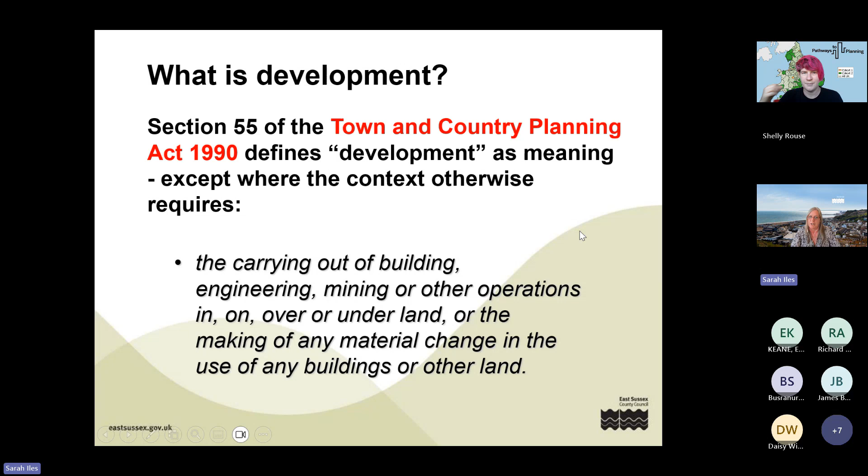So just very briefly, because it's not the focus of this session, for county council development, I thought I'd give an indication as to what sort of things we do. It can be challenging because when we're determining a county council application, we're the applicant and the decision maker, and that can be really, really challenging sometimes, particularly in the perception of the public. It can be, well, you're judge, jury and executioner - how can you possibly make a rational decision? So things can be challenging, but this is why we have transparency.

We make sure that everything is - if, say for example, we had an application for a household waste site, which our department deals with, it wouldn't be a report or a decision by the director. It would come down to head of service level or myself. So it's keeping those transparencies.

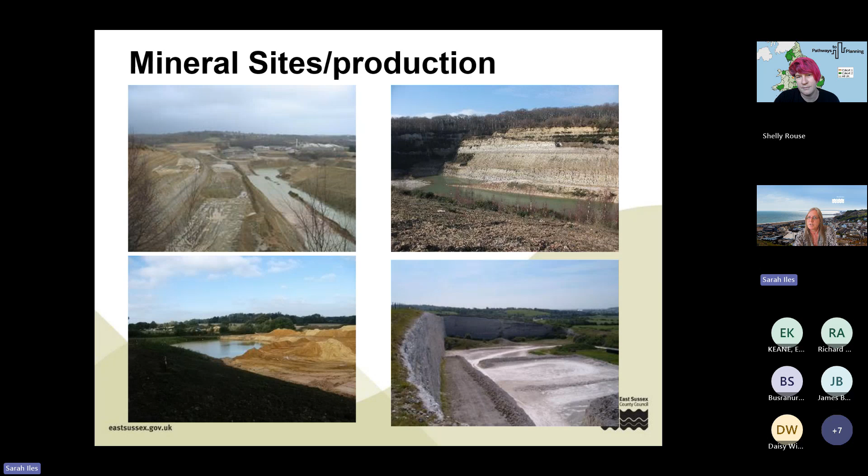So all of the working ones we have have now been restored, so we don't have any active ones, but there's nothing to say that if the need arose they couldn't be brought back, because the one here in particular, Tarring Neville, just outside Newhaven, used to be extracted solely for use in the Artex factory in Newhaven. If they resumed production, there's probably about 40 years of reserves there, so there's a lot of chalk.

Okay, so this is Land won, sharp sand and gravel.

So it's very different to the building sand, the soft sand. This is the only active quarry we have, and it's going to be running out. They have to cease extraction in January 2027 and restore the site by January 2028. So what that means is when the NPPF says we should have a land bank of 7 years supply for land won aggregates, we don't have that. So we are going to be reliant solely on imported sand and gravel, because this will be the end. We won't have any others.

The operator did put in for an extension. When we did the review of the plan, they put in a proposal to extend it. The trouble is it's got so many designations - we've got European designations, it's triple SSSI and everything. And we had strong objections from Natural England because to basically extract further would cause irreversible harm to the designation. It was a geomorphology issue.

So we took it through examination and we basically were able to demonstrate we can rely on imported sand and gravel. We've got the facilities for those. So that's been quite challenging, and it was quite a thing to get through. But we haven't got very long left of that.

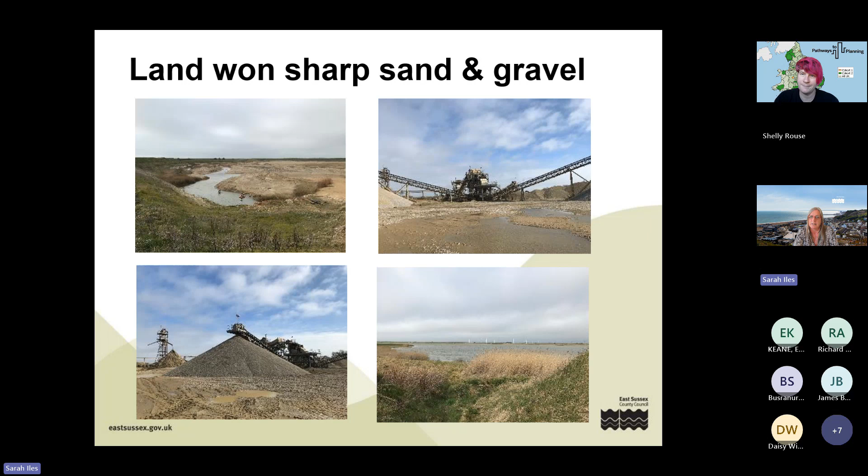But then what will happen - and one of the good things with minerals is the restoration of them. And I've just got this one here. I did borrow that photograph from Nature After Minerals, which is a great website to go onto, loads of stuff, hopefully the link will work if you get sent the slides around.

One of the great things about minerals is the restoration that can be achieved. Historically, BNG and everything has always been overachieved by mineral sites. So sometimes you'll get a clay pit or an old quarry like this, and the restoration is to fill it and return it back to either farmland, grassland, whatever, or create habitats like this. So that's really good and a really positive thing. I think the minerals industry probably will get wise to the fact that they can create way over 10% BNG, and I'm sure they'll start selling the credits and everything.

But the other thing with minerals is that it's classed as a temporary use, and so once the minerals is finished and it's restored, it's classed as undeveloped land. So on the basis that we're going to be losing or ceasing to have any land won aggregates, that's why we're really reliant on imports.

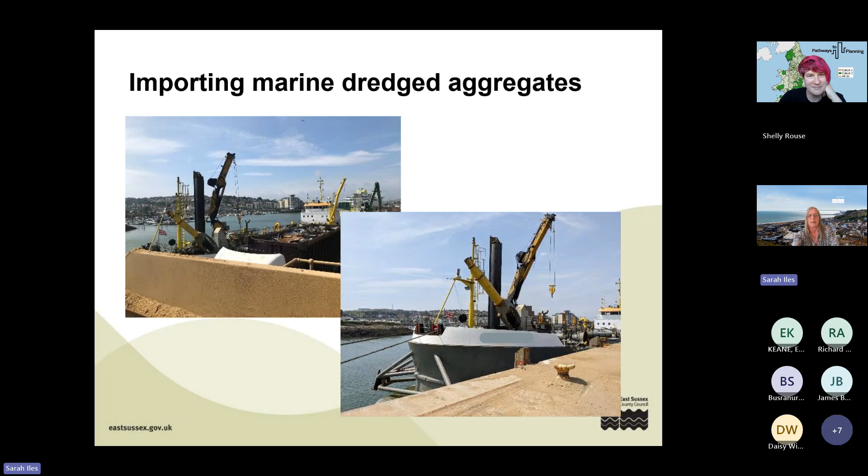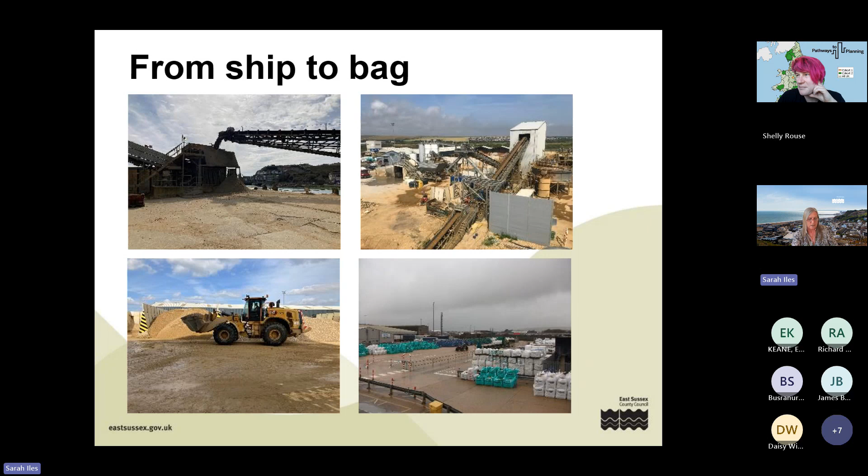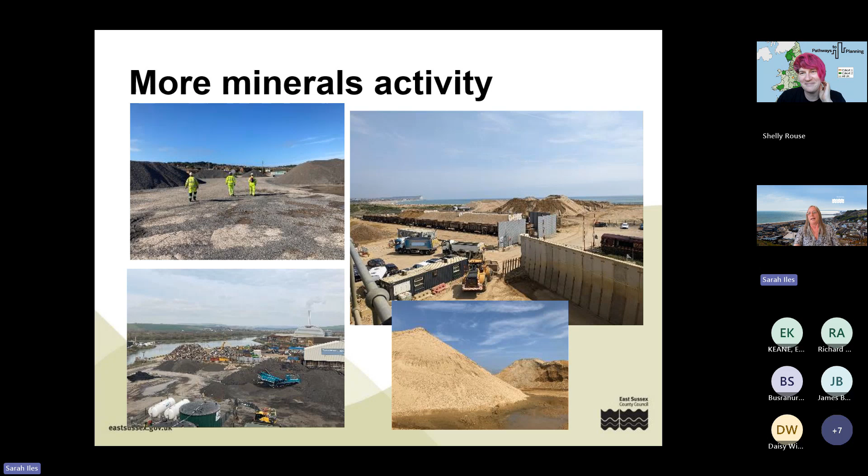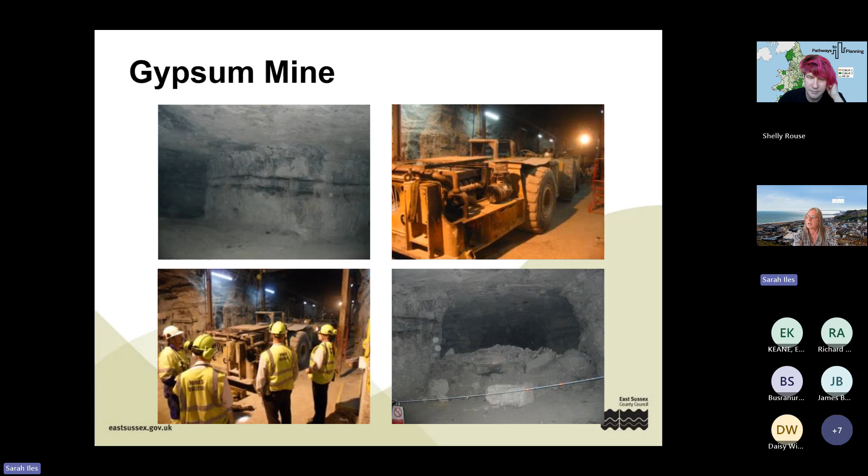The last time I went down, I ended up about 3.5 kilometres from the mine shaft underground - there are so many reserves down there. You can see the machinery they use for blasting, which they do about once a week, depending on what they need. The shift workers go down for 12 hours, and everything they need is down there - they don't emerge during those 12 hours.

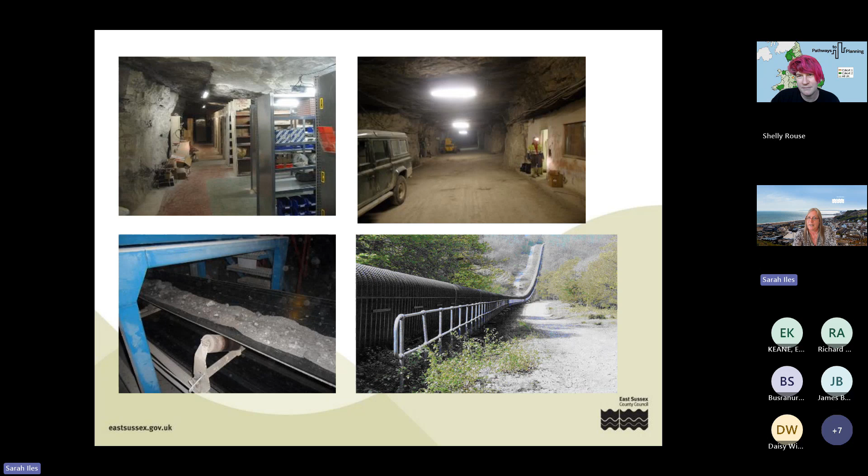What happens next is really exciting too. Once they've blasted and processed it, it goes onto the conveyor, shown in the bottom left photograph, then emerges out of the mine on the right-hand side and goes onto this overland conveyor, because the place where it's processed into plasterboard and other products is quite a way from the mine entrance. The red dot on the top left is where the mine is, where it comes out, and the conveyor belt runs all the way along to the red dot on the right-hand side - just over 3 miles on the conveyor before it's processed.

Historically, this is the Brightling mine - there was also a Mountfield mine, which was closer to the works. Historically, it was far better to put in a conveyor than to move the processing plant. The other good thing about the works here is the factory element has a railhead, so stuff comes in and goes out by rail.

So we import desulphurised gypsum from Spain, but that comes in by train, so it's quite sustainable. Again, with all minerals, you can only extract them where they exist.

So we're very mindful. There's a lot of ancient woodland here, it's in the High Weald National Landscape and everything. But you have to sort of weigh things up and just make sure that they can compensate and mitigate everything.

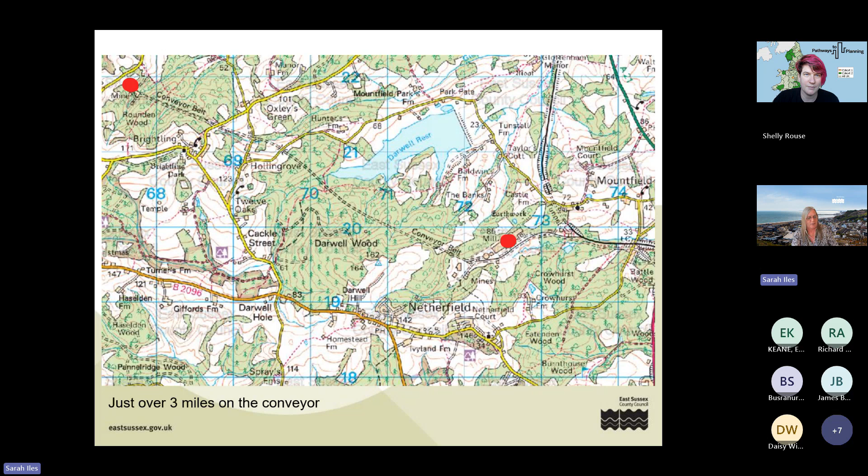So that's quite exciting. So the other wonderful world that we deal with is waste. And I think the trouble with waste is everyone has this perception that it's dirty, horrible, smelly, and it's going to be awful.

I think a lot of what we do is trying to educate, certainly when we're doing the policy work, the plan work, is to try and explain to people that's not necessarily what it means. It could be this guy with the cardboard, or if you ask people where they live and say, well, there are 3 waste sites within a mile of you, they're like, oh, I didn't know that. So it's really people's perception. But at the end of the day, we have to deal with the waste that everyone generates.

And I think if a lot of people went to some of these waste sites, they'd be absolutely amazed at how clean they are and the technology involved. So I'm just going to give you some examples of waste sites.

So the top left one, that's a composting facility, which is classed as open windrow, so basically that's all out in the open. The green waste, so if your councils do a garden waste collection, or you take green waste to your local tip, it will end up somewhere like this. Basically what happens is it goes through a shredder, and then it's put into these windrows, which are basically long piles of it, and then it's turned on a regular basis, and the heat causes it to decompose down. You end up with a nice compost at the end of it. So that's a fairly basic outdoor one.

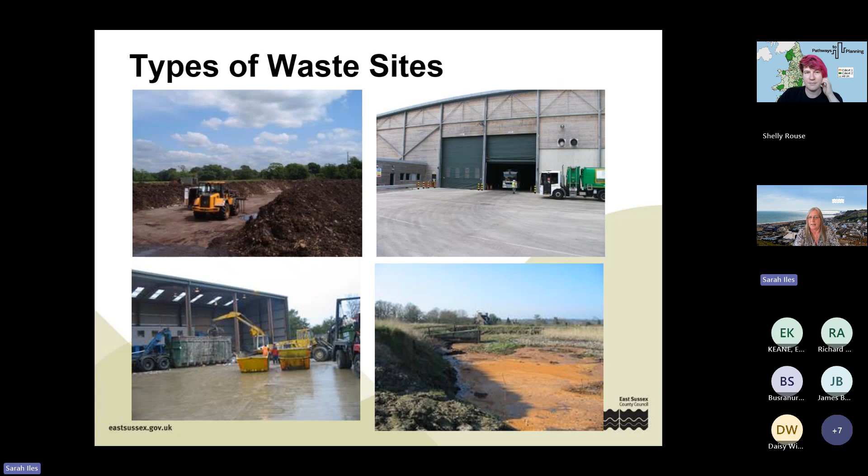So this is the other extreme of things—the Newhaven Energy Recovery Facility. It's a huge building, and when we were dealing with the application it wasn't very popular. We had, I think, 16,500 objections, so it was very controversial at the time. It was on land allocated for waste uses, at the end of North Quay in Newhaven. The design was a challenge because it's adjacent to what was an area of outstanding natural beauty, now the South Downs National Park.

So the building's actually sunk down by 19 metres. From an engineering point of view, when construction was going on it was really amazing—fantastic to watch.

This facility can handle about 235,000 tonnes of waste. Originally, when permission was granted, there was a condition limiting it to waste from within the plan area—the administrative area of East Sussex and Brighton and Hove. Because recycling rates increased, the actual volume of household waste going in went down, so they need to keep a certain throughput. The condition was relaxed so that, while the priority is still plan waste, waste from outside the area can go into the facility. It generates electricity for about 22,000 houses.

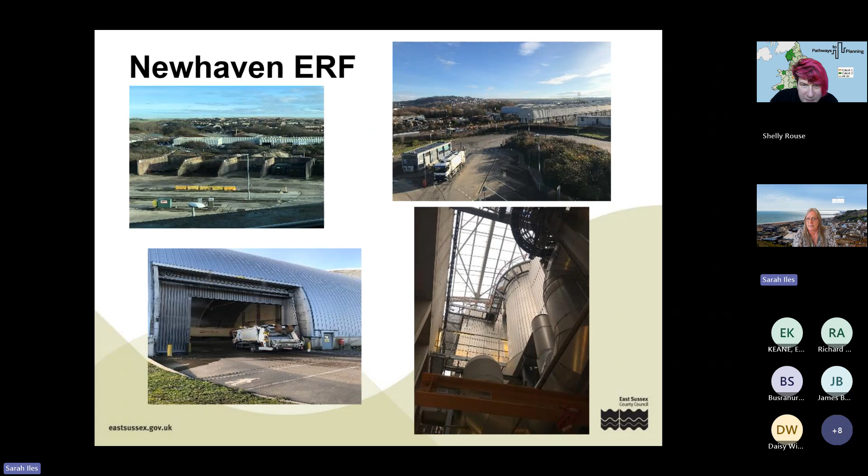If anyone is ever down Newhaven Way and wants a site visit, let me know, because to do a tour of that is really great, you get to go inside and see all the furnaces and everything. A lot of design went into it to minimise the impacts. The other photographs are of the inside near the turbines, which is quite space agey.

So this is the IBA facility, that's incinerator bottom ash, or inert bottom ash as some people call it. You can see the ERF on the top left, and to the right of that there's a long shed, which is the one you can see in the other photographs.

Originally it was planned that the bottom ash would go out by road, but an operator set up a site here and brought the rail sidings back online. So the bottom ash comes out of the ERF by tractor and trailer, is stored in the building until it's full, then a train comes in, takes it off, and it goes to a site where it's reprocessed, effectively turned into something like a roadstone or road sub-base.

Certainly when we were having the Bexhill Hastings Link Road built, the road scheme I showed the photograph of earlier, the bottom ash went out of Newhaven, was processed, came back to Newhaven, got loaded onto trucks, and was used in the road scheme.

I suppose the word ash is a bit misleading, it's not really like ash. It's like stone, not what you'd get from a household bonfire. It's lumps of rock and everything, which is why it's repurposed.

In terms of the fly ash, which is another byproduct, that's classed as hazardous waste. It goes off, I believe, to the salt mines in Cheshire where it's buried, because it is hazardous.

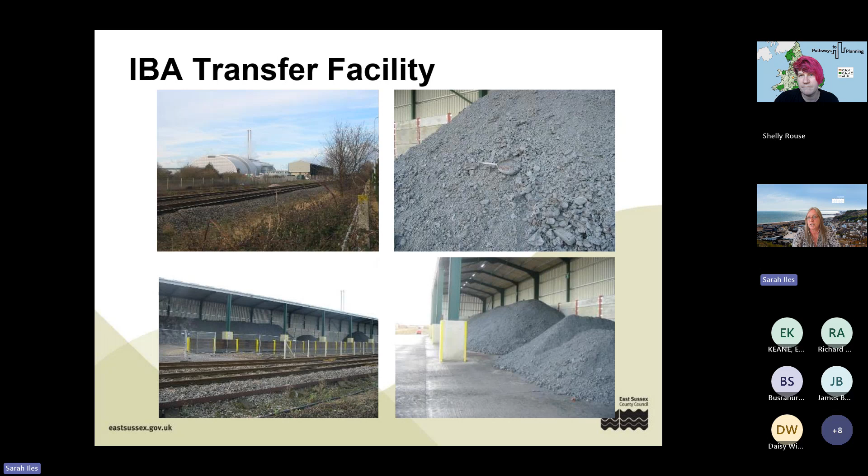Just some more waste sites. Again small scale, you've got tyre baling, they do nothing more than get waste tyres and bale them up, then they go off for processing elsewhere. We've got another facility in the county that actually processes the tyres, breaking them down into a crumb, which is reused, maybe for equestrian arenas or kids' play parks.

We've got scrapyards, quite a few of those in the county. The bottom left is one where, with loads of development going on, there's loads of muck away and spoil generated. So this operation does muck away, puts it through a screener like this which sorts the materials into different grades, then mixes it with say compost, and sells it on as either a sub base or topsoil. Again, quite small scale.

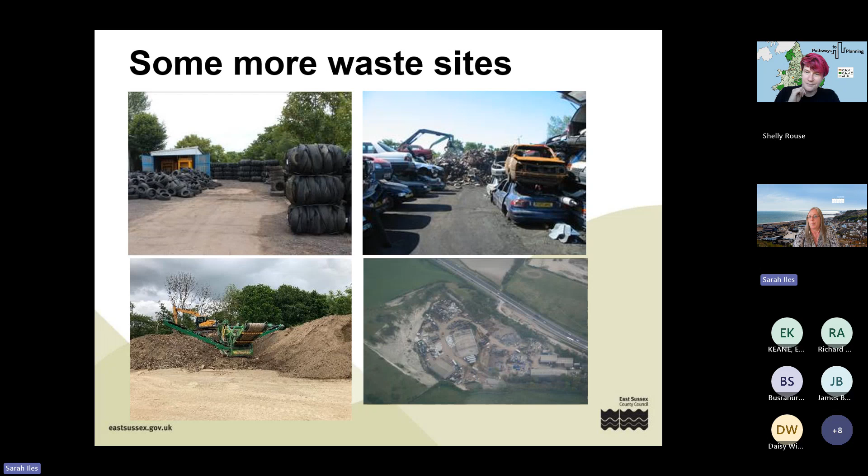The other one is an aerial photograph of a former quarry, a former chalk quarry, but it's a huge, strategically important waste transfer station. Many years ago, during the fridge mountains, when there were no waste companies that could process the gases from the fridges, this was one of the first companies to get the equipment to deal with them. It's a really important facility, and it's so hidden away you wouldn't know it's there, because although it's next to the main A27, it's well screened, tucked in a former quarry, and you don't get views into it at all.

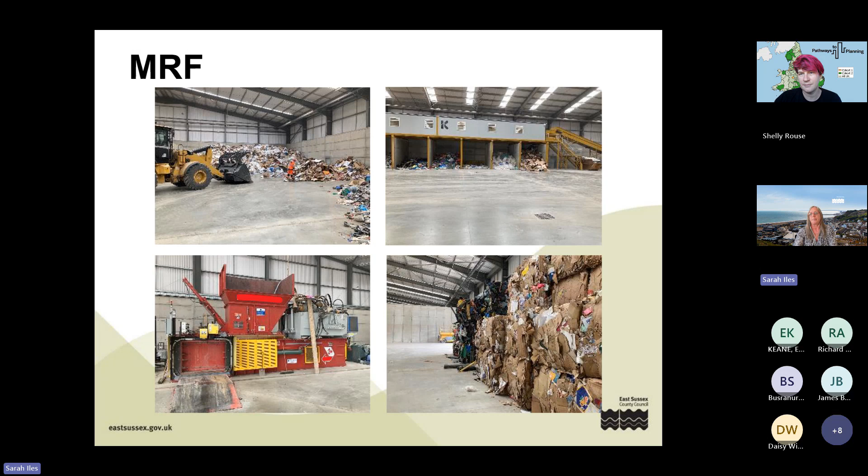So this is a really high-tech facility. It doesn't actually deal with any wastewater from the county of East Sussex - it deals with Brighton and Hove's wastewater. As part of this planning application we dealt with, there's an 8-mile tunnel that comes from Brighton all the way across, and then it's treated here, and then it's pumped out through a long sea outfall - about a kilometre and a half out to sea - and water's discharged there.

We've got several large scale wastewater treatment works, and one of the things that, with the development going on, loads of housing and everything, we're having to look at is how much capacity these facilities have got to take on all these thousands of new homes that are going to be constructed and built, because obviously they're all going to want to connect to the sewer network.

So that's something which we liaise closely with the water companies about - okay, do you have capacity? What is going to be your cut-off point and everything? So we can start planning - do we need to look at extending existing facilities or creating new facilities altogether?

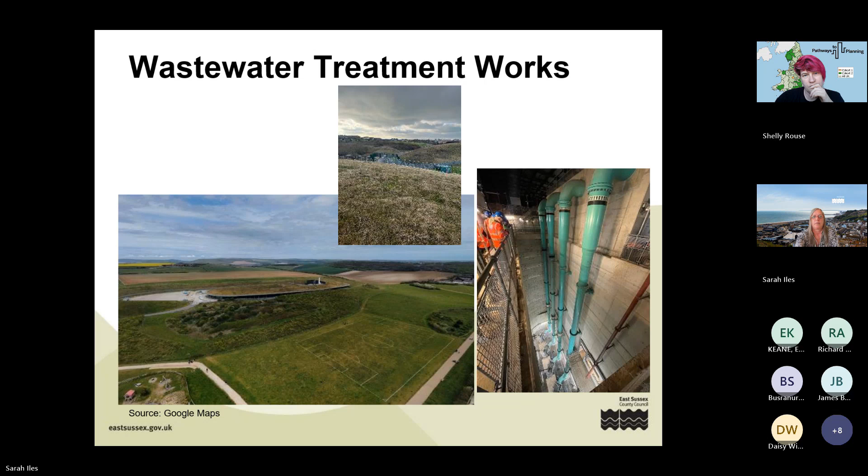When I was out on these visits, I said to the chap, what depth are we stood on here? And he was like, oh, it's about 50 metres of waste that we're stood on. And when you look back now, I think so much of that could have been recycled. It just shows that in the last 20 years, how leaps and bounds we've gone on, not putting stuff in the ground and actually recycling so much.

So we don't have any current landfill. Stuff or waste generated in the county that's not suitable for recycling or for the energy recovery facility will go to other landfill sites. The nearest one to us is at Redhill in Surrey, but waste travels huge distances to get to the right facilities to treat it.

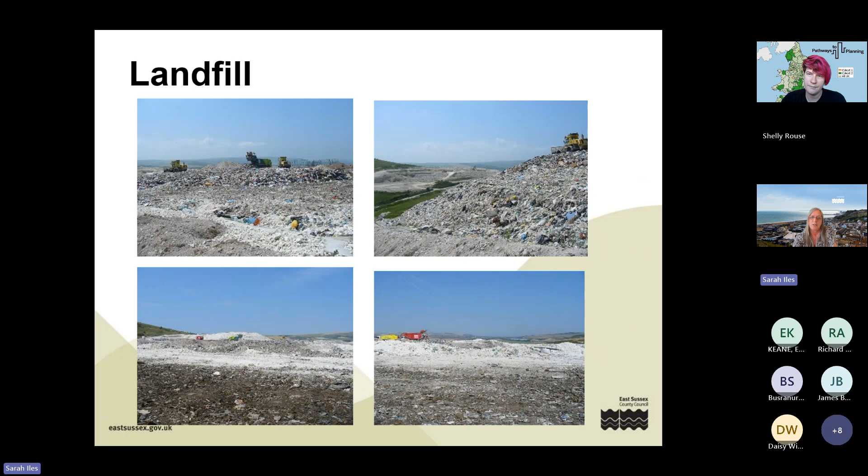One thing that will carry on happening is it still needs to be monitored, because that's going to leach for 25 years at least. It's going to be gas for it, so there'll be flues there. On this particular one, there are turbines that harvest the gas and then it gets put into the national grid. So again, there are some benefits from it.

There's talk about, you hear about landfill mining, but I don't think that there's necessarily much appetite for that at the moment, and so there's probably not the benefits of the expense of doing it to actually make it viable.

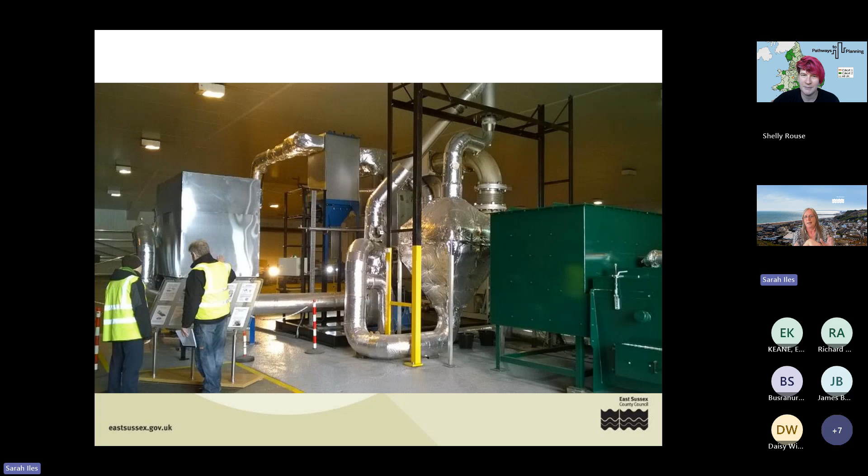So the development sandwich - I think this is probably an analogy, and people that know me get fed up of me saying this, but if you think of development as a sandwich, what lower tier authorities do is the nice juicy filling. You do the housing, the employment and commercial stuff, the recreational things, which is great, and obviously it's vital, and that's what the government is pushing everything towards. But a sandwich needs bread.

And so I see what we do as being the bread. At the start of the process you've got the minerals, because if you want to build houses and infrastructure you need the minerals to do that. And then equally, once you've built your lovely filling, you need the waste facilities to cope with what that's going to generate - whether it's somebody flushing their toilet, whether it's somebody putting a dustbin out, and where that's going to go and be treated. So I don't see us as a county minerals and waste planning authority and local planning authorities as separate - we should be working together, because without each other there would be no need for any of this. So it's very much a development sandwich.

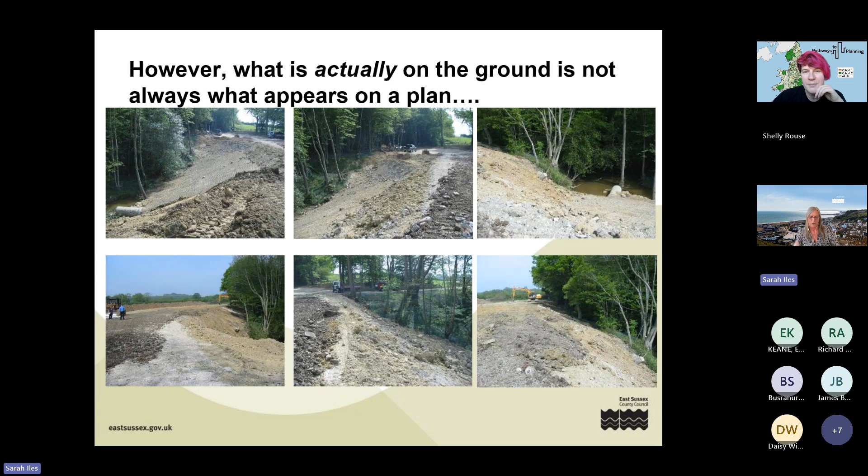This is an example of an agricultural determination for a farm track that was submitted to a district council, basically to say 'I want to do this, put a track through here, is that okay? Do I need permission?' So the agricultural determination was granted, permission not needed. Then I started getting the phone calls, because what actually happened on the ground - this is a very 2D plan, you don't see any cross sections or anything - when lorries started running in, it was actually a nice bluebell gill in a valley, and the road was going straight across it in a straight line. So an awful lot of material was imported to facilitate that development. I really would say, and I know the pressure that Ds and Bs are under in terms of the volume of applications you're dealing with - you don't always have the time - but just dig a bit deeper in terms of looking to see what is actually going on.

Okay, so again, this is scrutinised. This is an application that went to a district council for a new barn.

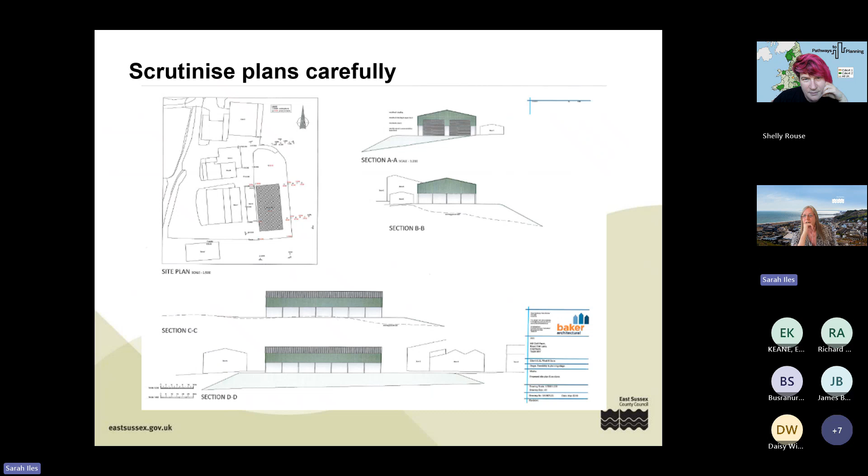Straight away, what leaps out to me is that you've got a change in levels of land to facilitate that barn. Slightly misleadingly, the supporting statement said some earthworks are proposed, but it's merely the infilling of a slurry lagoon. No earthworks were proposed which would raise the height of the land or otherwise constitute importation. So that's not quite true.

And again, you've got spot heights on here. The black is the existing heights, the red is the proposed. You can see that there's going to be a change in the level.

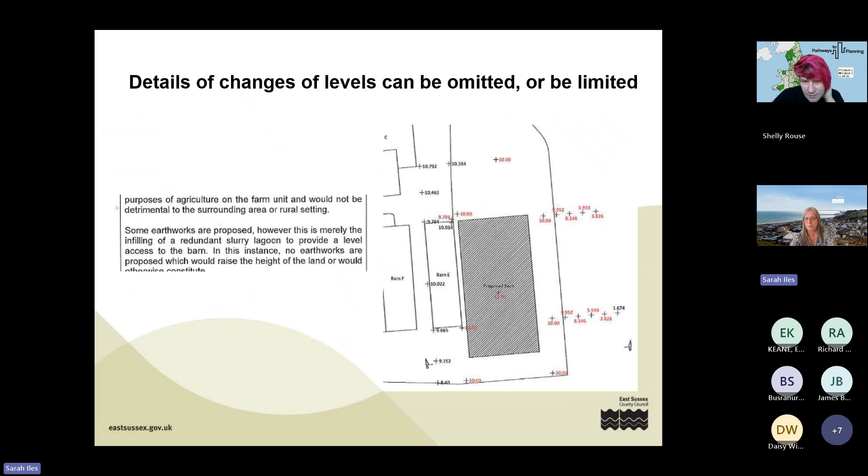Ask lots of questions if you get applications, because sometimes this can be a sham for a waste disposal operation. So things like: what's the topography? Does it have to be in that location? Why can't you do cut and fill, so you cut into a hill and use the fill to build up the other side?

Just ask lots of questions, because it's so much easier to ask at the start of the process than to grant something and then find hundreds of lorries running down country lanes. And it's no good coming to us to help, because we can't do anything if the development is lawful, even if it was slightly misleading. So definitely ask lots of questions.

I'm conscious time is marching on, so I'm just going to whiz through. I've got a bit about enforcement, which is my absolute passion. It is the Cinderella of the planning service, but I think here in East Sussex we're doing a pretty good job in terms of the waste enforcement we deal with. Our enforcement is predominantly waste - we don't have many minerals things, so we get to chase waste all over the county.

If you've worked with enforcement, you know there are two types of breach of planning control: undertaking development - this goes back to the definition in section 55 - and failing to comply with or contravening conditions attached to a permission. Most of our enforcement cases relate to undertaking development without planning permission, and the disposal of waste is classed as a change of use.

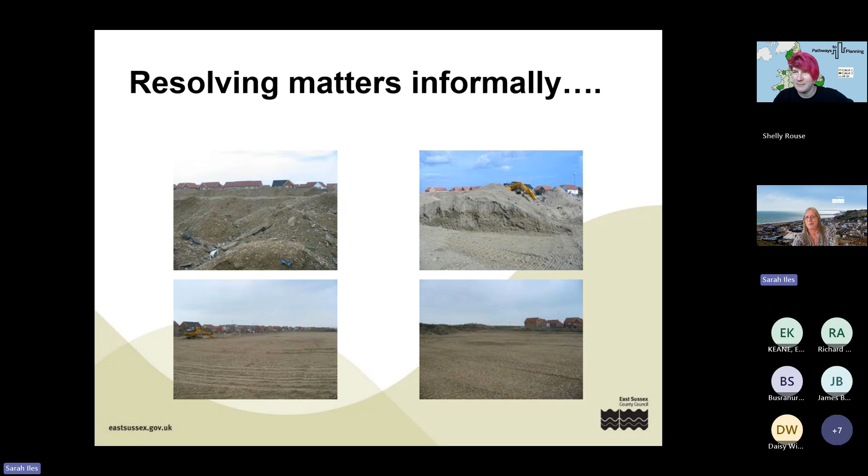So we wrote to the landowner, nothing, wrote again, nothing. So in the end, we served a planning contravention notice, asking exactly the same questions. He obviously took it as a bit of a shot across the bow, because he then responded and restored the site. So that's where it's just a notice, which isn't formal action, but it's enough to say, well, if you don't respond, we'll prosecute you.

This is one where, again for districts and boroughs, if you're dealing with an application — this was a new house that had planning permission. You can just see the edge of it on the top right corner. As part of the permission, I don't know if it's through a condition or a section 106, but it basically said any spoil from the development should not be deposited within the red line. Well, that was great, but the red line was quite tightly drawn around the property.

What it didn't include was the pond opposite. So they thought, well, that's okay, we'll just dump all of that spoil into the pond, which is in the High Weald National Landscape, of ecological value and everything. So we tried to get them to resolve it. In the end, we served an enforcement notice. Fortunately, they didn't appeal against it, and they reinstated the pond. So that was a result. But unfortunately, had the permission been slightly tighter, maybe saying you must dispose of it here or something, it would have helped. But anyway, we got that one sorted.

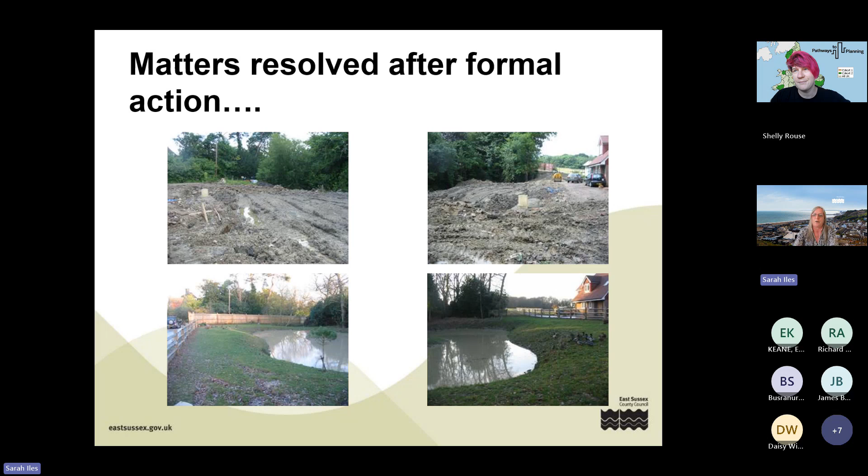This is a current case. I don't know if you can see it, but on the top left-hand picture, you can just see a little yellow blob in the middle — that's an officer from the Environment Agency.

He's 6'4", and he stood in a pile of waste. From financial records, we believe this particular landowner has made in the region of £500,000 from allowing lorries to go in and tip. He was charging between £90 and £120 a load. No planning permission, no environmental permit, nothing at all, totally unauthorised.

We are very close now to getting this resolved, and that's been done informally. We haven't had to go to the extent of a notice yet, but this is just an example of where hauliers, because it's so expensive to dispose of waste, will look at shortcuts. You'll see people advertising 'I've got a hole to fill' and this sort of thing. So there's lots that goes on. What we couldn't have is the council saddled with a bill for clearing this site, because we'd never get the money back. But fingers crossed, it's ongoing and progressing.

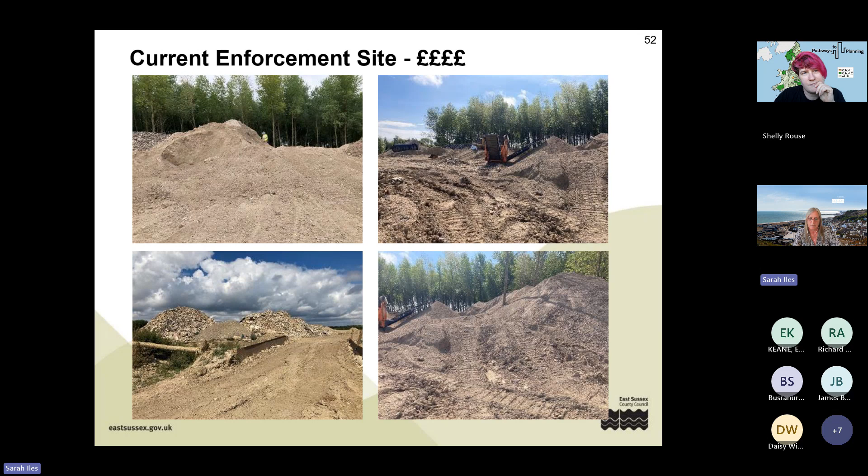So just very briefly, failure to comply with a notice. A breach of planning control is not a criminal offence, and I think that's misunderstood by a lot of people. They think, well, it's illegal. It's not illegal, it's unlawful, but it's not a criminal offence. But if we serve a notice and they don't comply with it, then that is a criminal offence, and that's when we can step things up.

We'll get people in for an interview under caution. All correspondence we then send to them at that point has to have the formal caution in it, because anything they say we would use in evidence. We try to avoid having site meetings if somebody's under caution, because unless you've got a recording device, it's a bit old-fashioned, isn't it, having to write down every single word.

We've got RIPA, PACE, CPIA - that's the Regulation of Investigatory Powers Act, the Police and Criminal Evidence Act, and the Criminal Procedure and Investigations Act. We all have to have regard to those, because if we screw up on a technicality, the whole thing could get thrown out if we go to court and haven't followed the procedures.

So it's really important. Options available to us: we can prosecute, and that includes the Proceeds of Crime Act. If we can demonstrate that somebody has made money, we can get a confiscation order if we get a successful verdict, and then they have to pay the money they've made from that criminality. That's really good, because if somebody breaches that, they can go to prison for not paying a confiscation order.

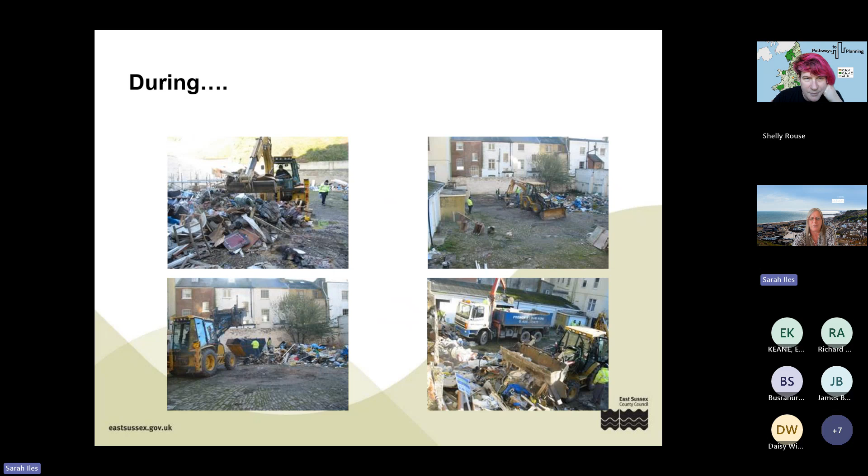So we got the police along, gained entry to the site using our default powers, and got a local company in to basically clear the site. It was a long day, exceptionally - I think it was November - and it was bitterly cold, but we worked through the day and got it done. That was a great result, great for the residents and everything.

We went to court, got a county court judgment for the money, they didn't pay up, so we put a charge on the land. We didn't really think there was any prospect of getting the money back. About 4 years ago, I was contacted because the land was being sold. Because an enforcement notice goes on the land charges register, when they were doing the conveyancing, it flagged up, and so we got our money back. Although it took a while, we did get it back. It just shows that if you persevere, take that enforcement action, and make sure it's on the register, you can get your money back.

This is an ongoing one. Somebody is operating a scrap metal and waste business out of a terraced property, using the rear yard and the highway at the front. We didn't think it was acceptable, so we served an enforcement notice in 2014. We've since prosecuted the landowner 3 times, taken direct action on one occasion, and it's still going on.

It's incredibly frustrating. We are constrained by the Town and Country Planning Act, so if there's antisocial behaviour or other things going on, we can't tackle that. They're advertising scrap and everything, they need things like a scrap metal dealer's license and a waste carrier's license, but those are controlled by other regulatory bodies, so we can't control that. All we can do is what we're able to.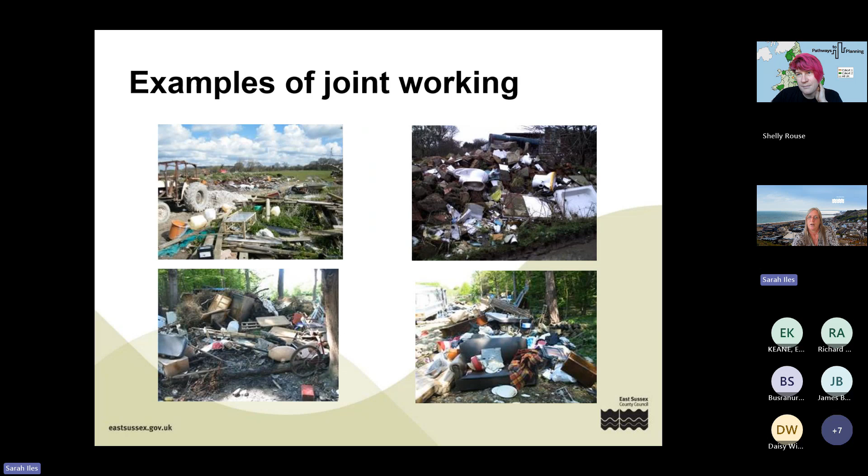Just some examples of joint working: the fire service approached us because they had an arson hotspot, and it turned out we actually had an extant enforcement notice on the site. So we were able to go to the landowner and say, whether you're doing this or not, you own the land, and if you allow this to continue happening, we will prosecute. With a bit of education from the fire service for the landowner and our pressure, we were able to resolve this one.

This, I think, is one of the worst cases I ever went to. This is ancient woodland in the High Weald. It looks a bit disorganised, but actually it's really, really organised. What had happened was an elderly man had the site, and he'd passed away, and one of his relatives had carried on doing things without the instructions of where to take waste. He'd just carry on collecting stuff, knew that scrap metal had value so he'd take that to get money for it, but the rest just built up and up and up.

So we worked with the Environment Agency, and we actually served an enforcement notice on the site, mainly because of the vulnerability of the landowner. We didn't want an unscrupulous operator to come along and say, oh look, this has gone on for 10 years, it's lawful. So we served an enforcement notice to stop the clock, but then we gave them, I think, 2.5 years to clear the site. We had monthly meetings with the agency, the landowner, and somebody representing him to work through and clear it, and that was great, so that worked really well. It's one of those ones where you go onto the site and think, oh, we're never going to deal with this, but actually, because of the personnel involved, it worked really well.

So this is utilising our resources. This is a site where travellers were involved, but there was a lot of waste activity going on. Because of the history of the occupants, we asked the police to go along with us so we'd have a bit of protection. They refused to do so, but they sent the police helicopter up for us instead, so we could get some intel on what was going on at the site and know what we were walking into. We had a code word for them if we got attacked, so we could call them. That was a different kind of joint working, but it resulted in a good outcome in the end.